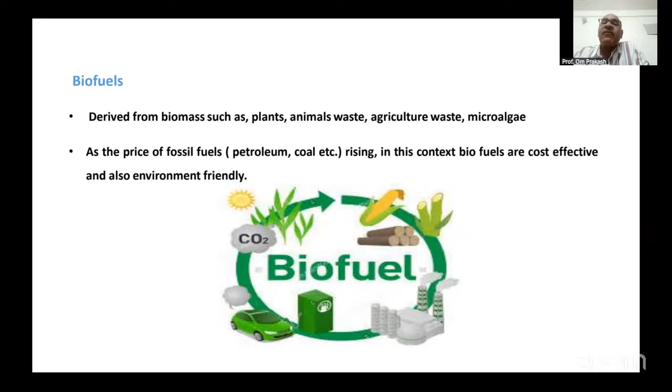Now, my topic is ethanol. Ethanol is a clear and colorless liquid produced from sugars such as sugar cane, sugar beet, and starch. Ethanol blending with fuel also improves the performance of the internal combustion engine. As for how ethanol is produced, there is first generation, second generation, and third generation. Nowadays we are moving toward second and third generation.

In first generation you will see sugar cane, sugar beet, starch, wheat, potato, barley, corn, etc. being used, and from there ethanol is produced. In second generation we normally see wheat straw, lignocellulosic material, rice husk, wood grass, and forestry waste; whatever waste there is, that is used. In third generation, you will find microalgae and seaweeds being used for the production of ethanol.

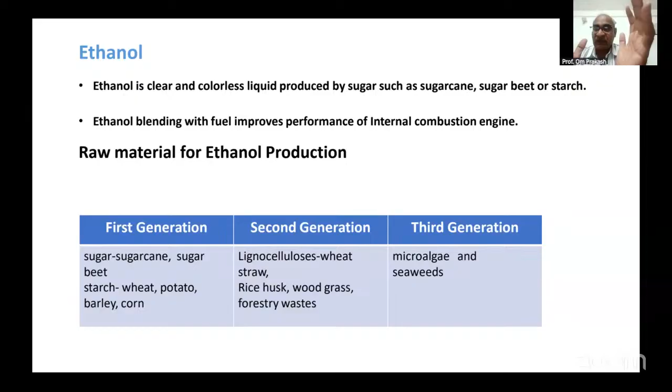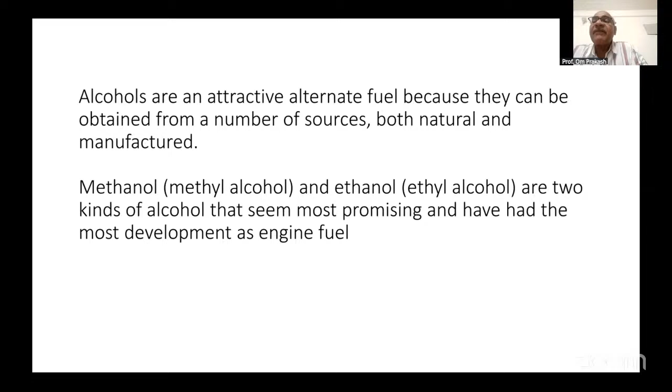So these are the sources by which we can produce ethanol. Next, what is ethanol? Ethanol basically is alcohol. Alcohols are an attractive alternative fuel, because they can be obtained from a number of sources, both natural and manufactured. Methanol and ethanol are the two kinds of alcohol that seem most promising and have had the most development as engine fuels.

Now you see the advantages. Whatever research we have done, or our ancestors had done, we have to see what the advantages are and why we would go for mass production or increase its use. First, it can be obtained from a number of sources, both natural and manufactured.

Second, it has a high octane number. That is the anti-knock index, and it is over 100, which means a very good fuel. A high octane number results in high flame speed, so the combustion time is reduced. Next, engines using high octane fuel can run more efficiently by using a higher compression ratio.

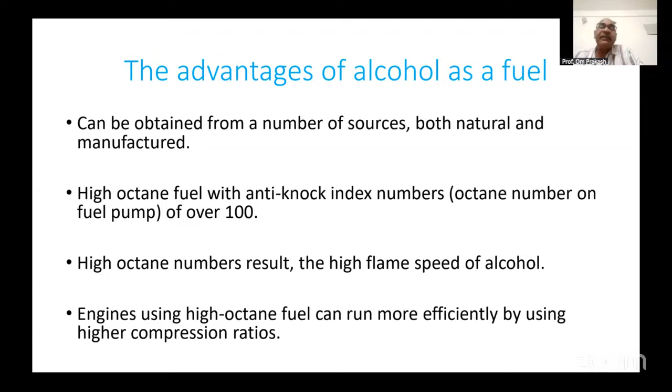As we all know, as the compression ratio increases, we get more work done. That's why increasing the octane and the compression ratio gives another advantage on the combustion side, which we get if we use a high octane number fuel.

Next, it generally has less overall emission, according to the research done. Compared with gasoline, when it is burned it gives far more moles of exhaust, which gives higher pressure and more power in the expansion stroke, because the compression ratio is higher. With a higher compression ratio, the expansion stroke will be higher and you will get more power.

It has high evaporative cooling. When the fuel comes inside the engine and evaporation takes place, the heat is taken from the air itself. The air and fuel mix and go inside the combustion chamber, and during evaporation a lot of heat is taken from the air, so the temperature is reduced.

When the temperature is reduced, the density will be higher, and because of that there will be more volumetric efficiency. So the high evaporative cooling results in a cooler intake process, which raises the volumetric efficiency of the engine and reduces the required work input for the compression stroke.

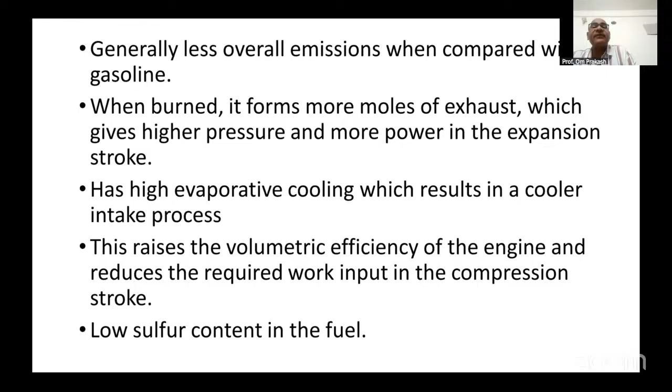Another thing you are finding here is the low sulfur content in this fuel. So these are the advantages you are seeing. And then, after seeing these advantages, we look at where the world is moving.

If you look at worldwide fuel ethanol production in 2021, the United States itself is producing ethanol; the figure is in millions of gallons. So you will see here around 15,000 million gallons, whereas Brazil has 7,500.

And if you see India, as we already discussed in the first discussion, a lot of solar energy is there in our country, and as a result a lot of vegetation is also there. But India is producing around 820 million gallons of ethanol, though presently we have approximately doubled that now in 2025. That's why we are using E20 at present.

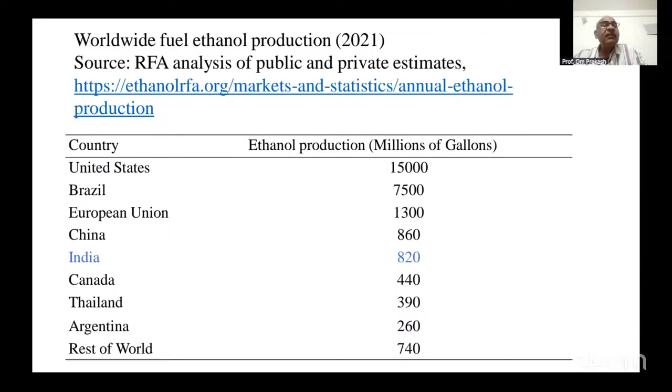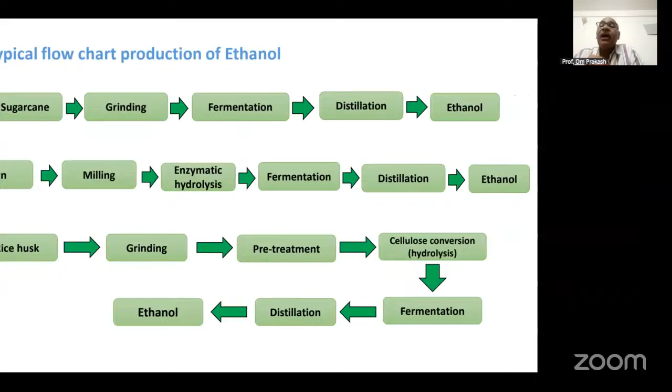Next, for the third generation, rice husk waste can be ground, and after grinding we add one more process, which is pre-treatment. After pre-treatment, we again break it into smaller ones through cellulose conversion, that is hydrolysis. After hydrolysis, we go for fermentation, then distillation, and then we produce the ethanol.

So now you are seeing the physical pre-treatment. After physical pre-treatment, you can see chemical pre-treatment taking place. Then we add the enzymes. Enzymatic hydrolysis is done, and then fermentation takes place, and you can see from the slide how fermentation is taking place. And then you see the distillation process for purification.

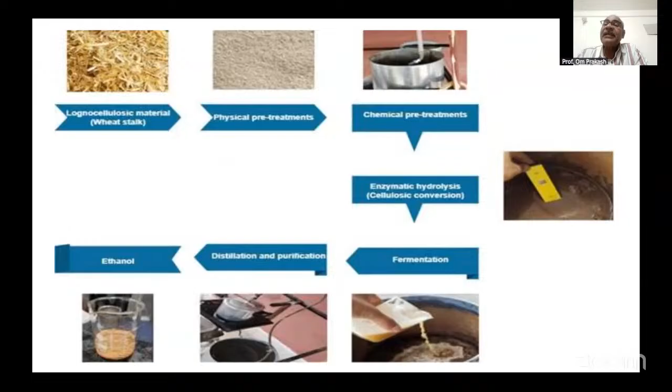Now in the next slide you can see ethanol production by rice husk. The main thing is the resource available. Rice husk is an agricultural waste which is available in abundance at low cost. Next, the beauty of this resource is that rice husk contains cellulose and hemicellulose. Around 670 to 750 million tons of rice husk is produced worldwide every year, and India is the second largest paddy producing country in the world.

You can think of what our basic resources are and where we are lying. So India, you can see, is the second largest producing country here. And in the figure, millions of tons versus the continents, that is one more thing we have shown.

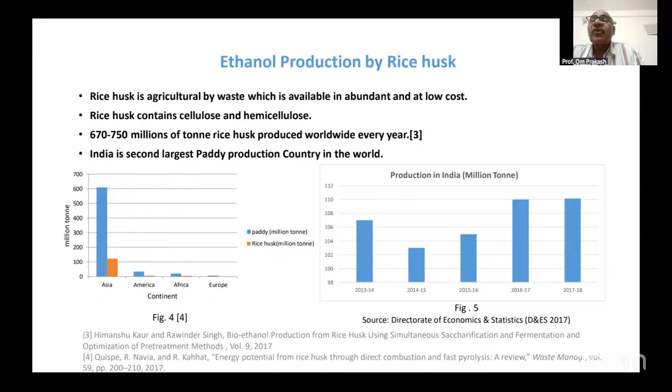And from the Directorate of Economics and Statistics, if you are seeing the production of India in million tons, what the rice is, then you can see here we are still growing very fast.

Now, next thing, the comparison of properties of different fuels. Because I have told you about ethanol, then we have to see how we are comparing this ethanol to the other fuels we are using, like gasoline, diesel, and others. Basically, these are the fuels which are being used.

If you are seeing the octane number, gasoline approximately has 90 to 100, octane number 98, 97 like this. But if you are seeing ethanol, it has 108 octane number. And I know most of you know what the octane number is. And I have discussed the higher octane number gives a very good higher compression ratio. We can go for that, and we can produce high expansion.

Then if you are seeing the cetane number, for gasoline we are not seeing that in the cetane number. It is just the reverse of that. So diesel has around 40 to 55 cetane number, and for methanol and ethanol it's not bothersome.

The calorific value, a second very important thing, which is given here in megajoule per kg. If you are seeing gasoline, it is around 43 megajoule per kg. If you are going into kilojoule per kg, then it will be 43,000 kilojoule per kg. Whereas diesel is approximately in the same range, around 44.65 megajoule per kg.

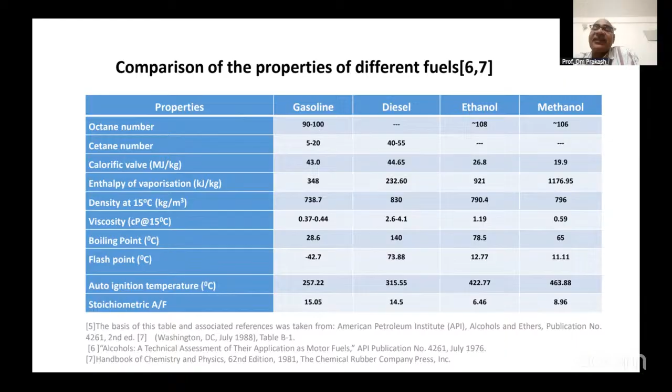So why this property is required: so that we can see what the compatibility of that fuel is, which we are discussing. So that's why you will see the compatibility of this ethanol.

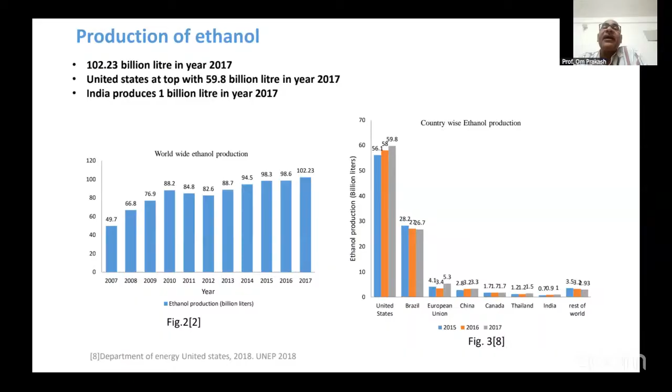Now next thing, if you are seeing the production of ethanol, here you see around 102 billion liters per year. Then the United States, how much it is, and how much India is producing. So from this figure, one can see ethanol production in billion liters, year-wise. The data available here is up to around 2017, and this shows the increasing trend in the production of ethanol.

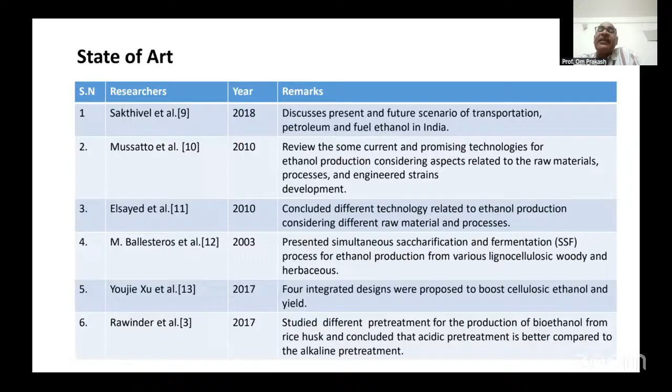Now, whatever the state of the art is, we see how it is going for the production. Through that we came to know what opportunity there is and what other researchers have done. On that basis we have formulated it. Then the experimental setup, because this is very important: we have seen that it is compatible, and we have seen that whatever property is required, that property is being met.

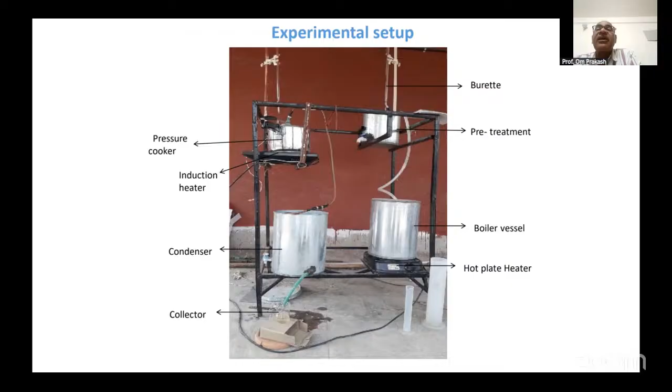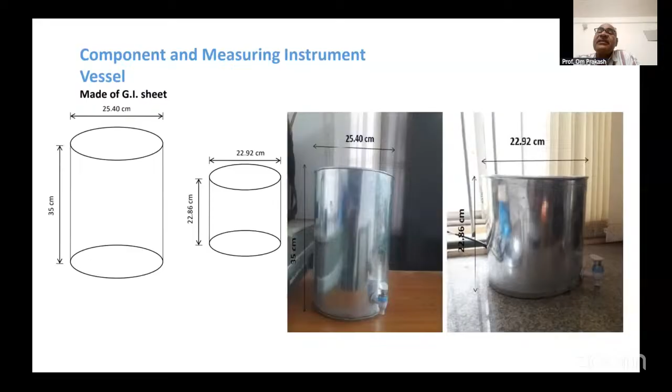Now next thing, what are the components, because the important thing is how much we are going for, what measuring instruments we are using, and how the components are produced. So now you can see it is made of GI sheet here. All the dimensions are given here, and with those dimensions the experiment takes place. Now you can see how we produce the condenser. Everything I am showing here is being done at the college level itself by the students.

So now you can see how they have produced the condenser: we have taken a copper tube around 3 meters in length so that we can have the coiling, and a vessel around 35 centimeters with a diameter of around 25.4 centimeters. The coiling is done, and that coil is put in the pot, which is around 35 centimeters with a diameter of around 25.4 centimeters.

And then you can see here the pH measurement, because pH is very important for the pre-treatment and is required for the fermentation; unless that pH is maintained, the fermentation will not take place, or if fermentation takes place, it will be in a smaller quantity. So you will see the range here of the measuring instruments we have taken, their dimensions and weight, because the measuring instrument is one of the very important things for measuring the quantity produced.

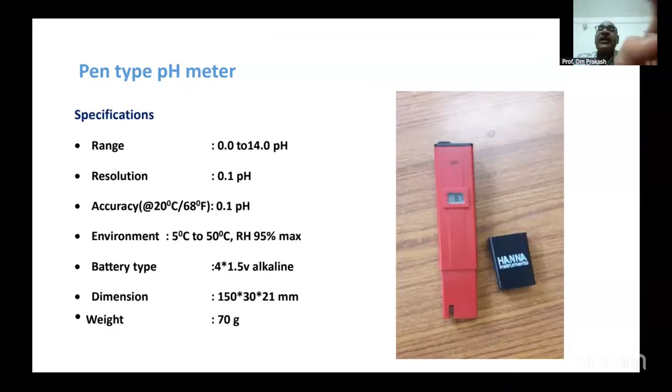So that's why it is an important thing, and we have to specify that. Now next, the calibration of the pH meter is also being done, because we have to check what instrument we are using and whether it is giving the correct reading or not. So for checking the correctness, calibration of the instrument is very important.

For the calibration purpose, you can see here the calibration with the buffer solution of pH 7, which we have taken because it is already fixed, and through that we have checked and found it correct. If any mistake or deviation is there, then the deviation we can write down.

Then another checking we have done is the calibration by buffer solution of pH 4.1 for the acidic region, and that also we have noted down. Then again checking with calibration for the buffer solution with pH 9.2 for the alkaline region. This range itself shows that if we are checking with different ranges, we will find if any deviation is there, and that deviation can be added to whatever exact reading we are getting during our measurement.

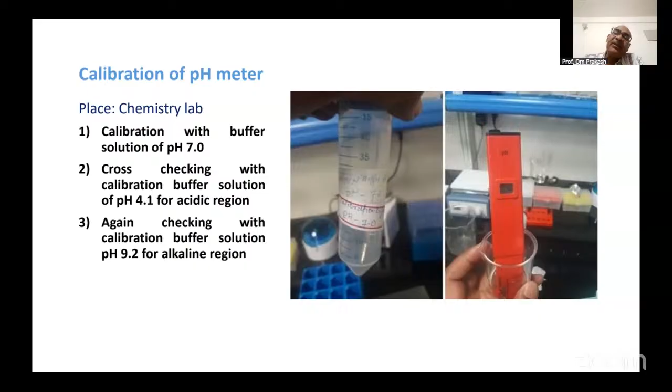So it is a very important point for the calibration, for any things we are taking for the purpose of measurement. Now next, the hot plate is there, and its specification you can see here very easily. This is around 1250 watt we have taken, and the voltage accordingly, and here the burette we have taken, that also 50 ml.

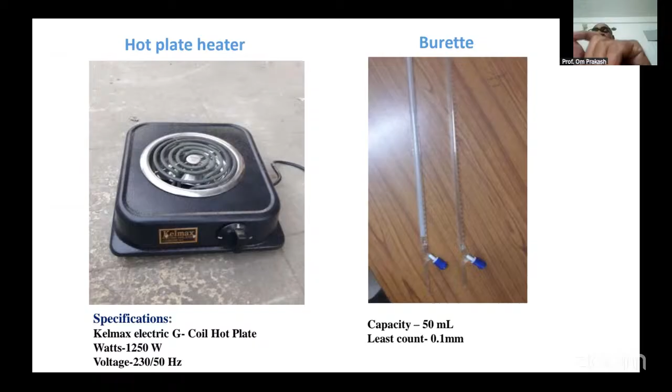And why the burette is there, so that whatever quantity of this pre-treatment enzyme we can put it in this, and that will give exact measurement.

Now if you see the induction here, we have specified all the inductions, in which the weighing machine also—that weighing machine has approximately 0.001 gram accuracy.

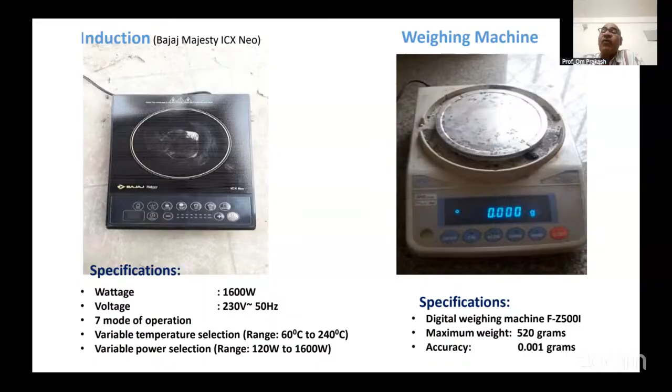And you can see the variation of temperature if you are selecting the heating instrument, that is approximately 60 degree to 240 degree. And variable power selection we can do from 120 watt to 1600 watt. These are very important parameters when you are going for the experimental work, so that we know how much variation we can take.

If you see here the high temperature thermometer, what is approximately the temperature and accuracy, how much it is there. Approximately, if you are measuring minus 20 to minus 50 degree centigrade, in that case plus minus 2 degree variation is there.

And around minus 20 to 200 degree centigrade, around 1 degree variation. And again for the higher range, around 200 degree to 300 degree centigrade, you can see plus minus 2 degree variation. From this you can see the importance of calibration.

Then another LCD digital thermometer we have used, and that also has a temperature range of minus 50 to 110 degree centigrade, with accuracy around plus 2.5 degree centigrade to 1 degree centigrade.

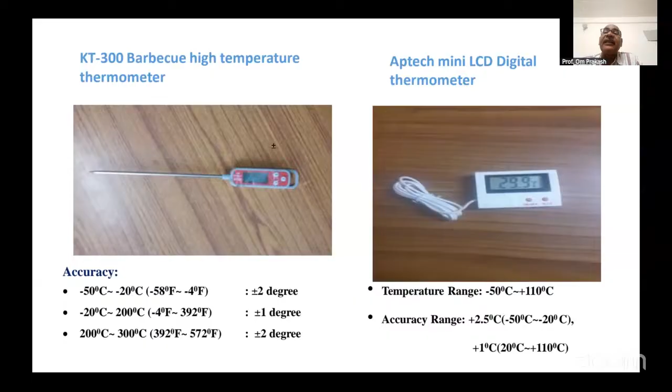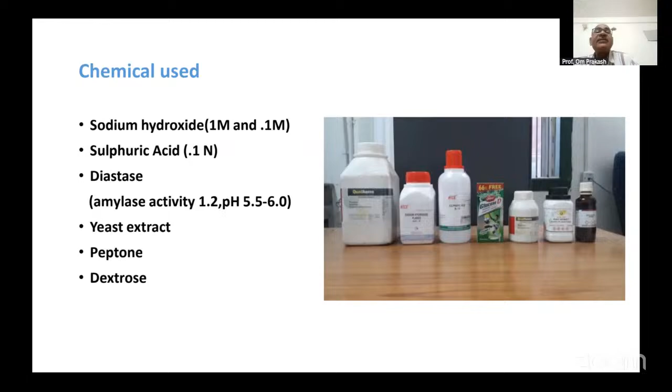Now next, the chemicals used for the pre-treatment and enzymatic treatment: sodium hydroxide we have used, sulfuric acid, yeast extract we have used, and peptone and dextrose, which is being used for this treatment process.

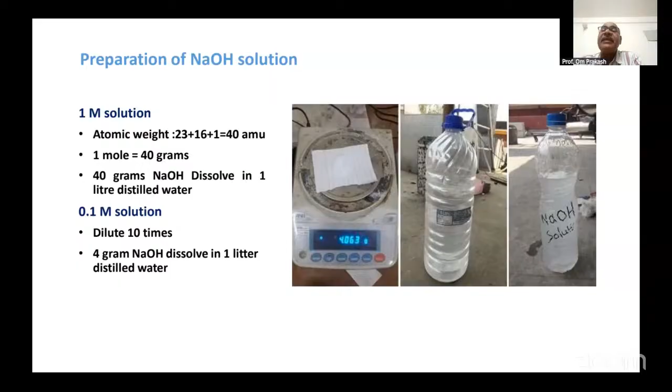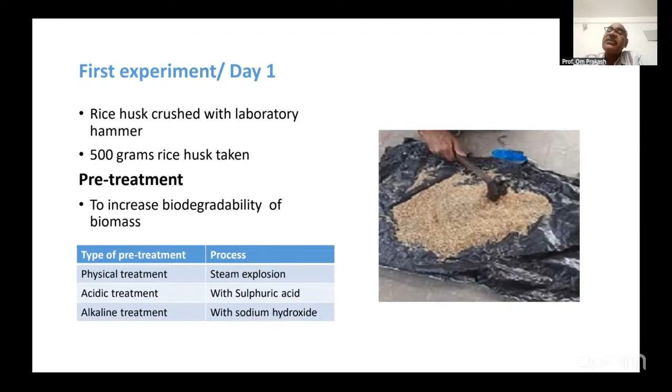We have done acidic treatment using sulfuric acid, and alkaline treatment using sodium hydroxide. After all this treatment, we have measured the physical treatment, steam explosion, for which we have taken a boiler. From the boiler the steam is produced, and that steam is given for treatment.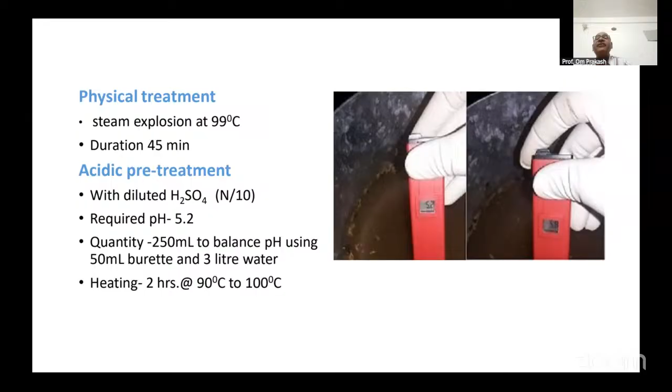The duration, how much time did we go for that? Around 45 minutes we have gone for that. Then for acidic pre-treatment, H2SO4 we have used, and the required pH is 5.2, quantity around 250 ml, and we balanced that. Heating around 90 to 100 degrees for 2 hours we have done. Then you can see, by balancing the table here, the quantity of sulfuric acid and equivalent pH is given in the table.

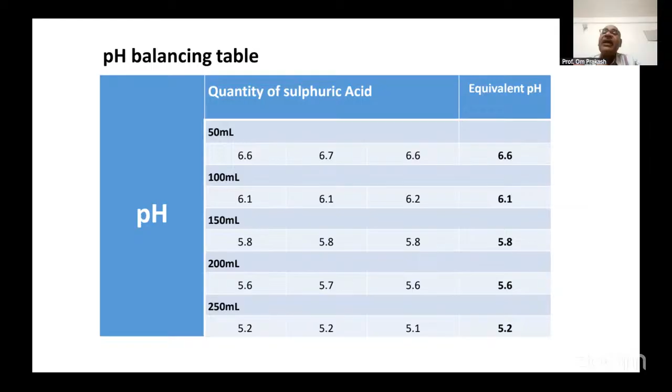From that table, one can visually see 50 ml, 100 ml, 150 ml - different quantities of 50 ml each time. When we did this, we got the equivalent pH.

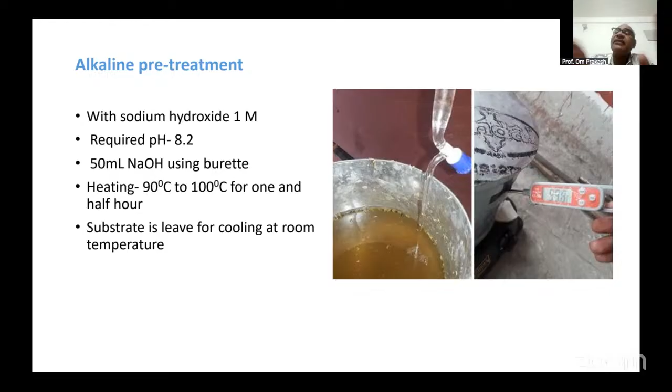Then the alkaline treatment: sodium hydroxide solution, you can see from the burette how it is being mixed, so that we can increase the pH to 8.2. 50 ml NaOH is used from the burette, and then it is treated at 90 to 100 degrees for 1.5 hours, and the substrate is left for cooling at room temperature slowly. This cooling is done so that we can stop the treatment. After treatment it reaches normal temperature, and then finally we go for enzymatic hydrolysis.

Enzymatic hydrolysis is for breaking cellulose and hemicellulose into simple sugar. That's why enzymatic hydrolysis is done. Amylase with fungal diastase is used here. The quantity approximately used for 5 kg is 0.6 gram per liter - around 1.8 gram dissolved in 250 ml conical flask, mixed with the previous substrate.

Then we got the pH around 4.2 by adding some more H2SO4, approximately 50 ml we have added. Through heating at 80 to 90 degrees for 45 minutes, the solution is then incubated for around 24 hours. Why 24 hours incubation? So that the enzymatic treatment can be completed - otherwise it takes more time, and that time is what we have given here.

During my experiment, at this stage it is around 24 hours. So further, for the next treatment, whatever quantities or pH or other things we vary, in that case how we can reduce the enzymatic treatment time - that incubation time - from 24 hours to a smaller one. By trying different temperatures and different treatment methods, we can find the optimal quantity, and that's why this experiment has been done to find that out.

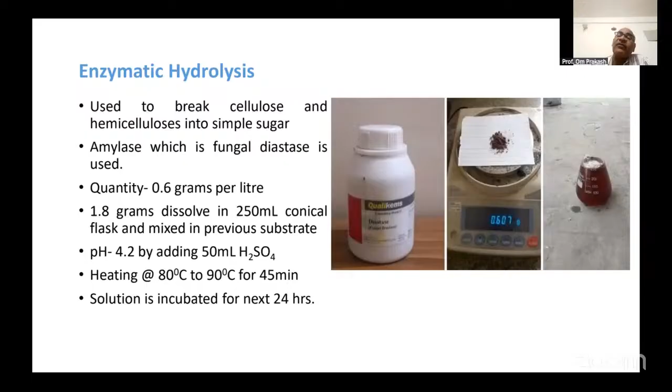The pH adjusted here is approximately 5.8 by adding 100 ml more H2SO4. It takes around 3 days to complete the fermentation. Again, as a researcher, we see the fermentation takes 3 days, whereas the enzymatic treatment takes 24 hours. So both processes require a lot of change - we have to see how we can reduce the fermentation time, along with reducing the enzymatic time.

This is again by varying the different quantity we have taken, and by varying that quantity, that will produce lesser time, making the production process more simple, and that can be increased. That's why this variation is required.

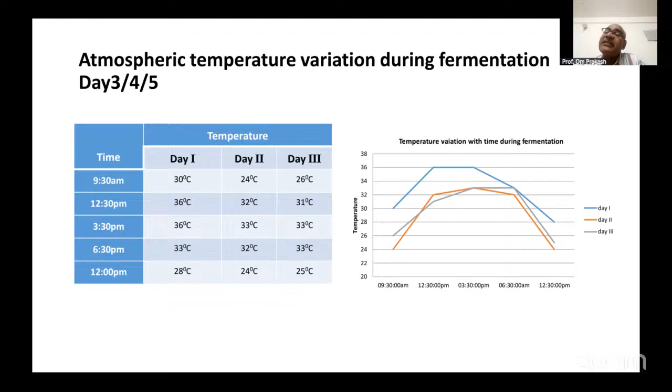Now if you see the atmospheric temperature variation during the fermentation time for the third, fourth, and fifth day, you can see every time the temperature is measured, and the diagram shows it during the fermentation, because fermentation depends upon the temperature. Now if you see the result of the first experiment, we did not get a satisfactory result after fermentation, and the major reason we found is we did not use proper fermentation media.

Next, the fermentation does not occur properly because the vessel is opened early. That means if the vessel is opened early, we are not able to take out that material. Also, distillation is accomplished using simple insulated vessels, therefore leakage of vapor happens, and that should not happen — it should be covered very easily.

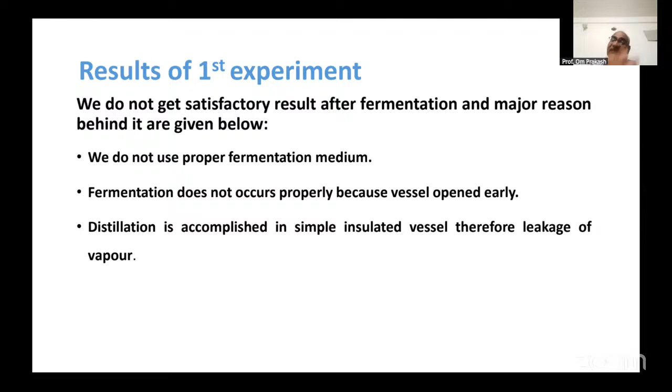So from that first experiment, these are the results we got, and we implemented these results into the second experiment.

In this second experiment, the preparation of biomass involves rice husk cleaning and drying in sunlight, then the rice husk is milled to flour. Earlier we had just done hammering, but in this second experiment we did crushing and milling so it becomes smaller particles. So 1 kg of rice husk powder was taken for the experimental purpose.

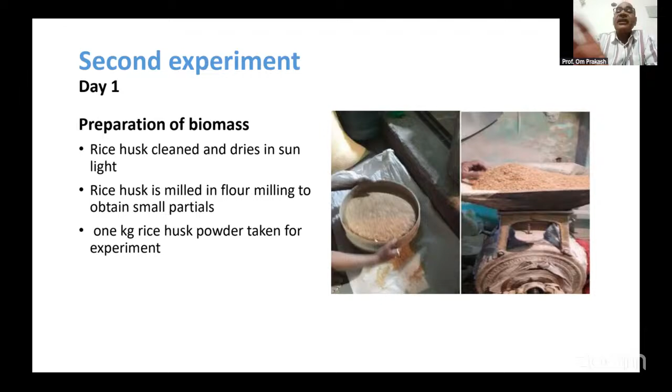Now you can see the milling machine here. We put the rice husk into this machine and milled it so that it becomes smaller parts.

Now on the second day, for the pre-treatment of 1 kg rice husk, we did physical treatment with a 99 degree centigrade steam explosion.

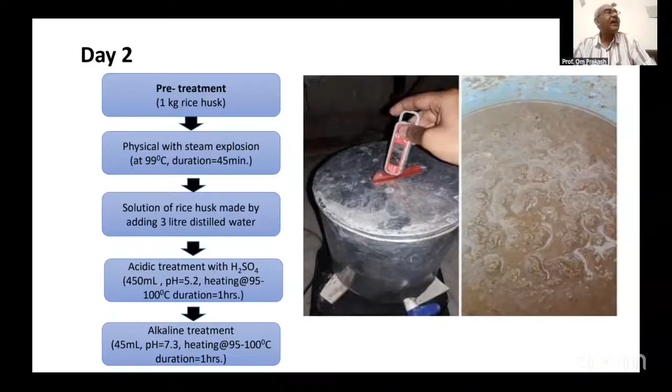Then alkaline treatment is done again — we performed it using around 45 ml, with pH at 7.3. Heating again at 95 to 100 degrees centigrade for 1 hour.

Then on the third day, enzymatic hydrolysis is done. We put 1 gram per liter here, with 4 grams dissolved in a 250 ml conical flask.

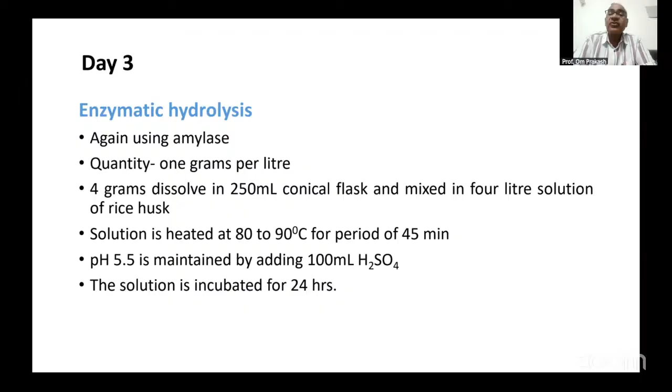That solution is heated at 80 to 90 degrees for a period of around 45 minutes, and then the pH is brought to around 5.5 by adding H2SO4. The solution is incubated for 24 hours, and then fermentation is done for 4 days.

For fermentation we put yeast, peptone, and glucose — these three things are added, and the total solution is prepared to 3 liters, with the fermentation temperature maintained around 37 degrees. The pH is again maintained around 5.6 by adding 100 ml H2SO4.

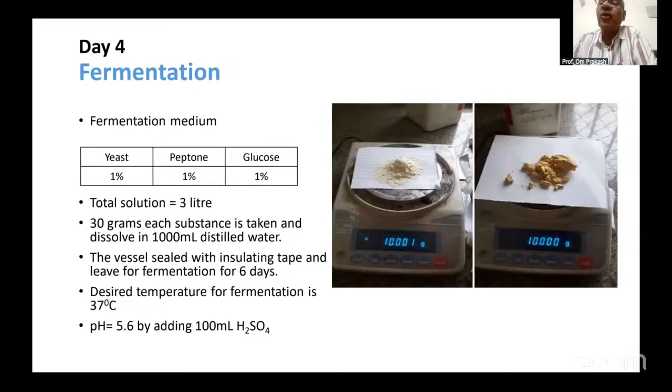Now you can see the things we put in, like yeast, peptone, and glucose — all of this is measured here and then added to the solution.

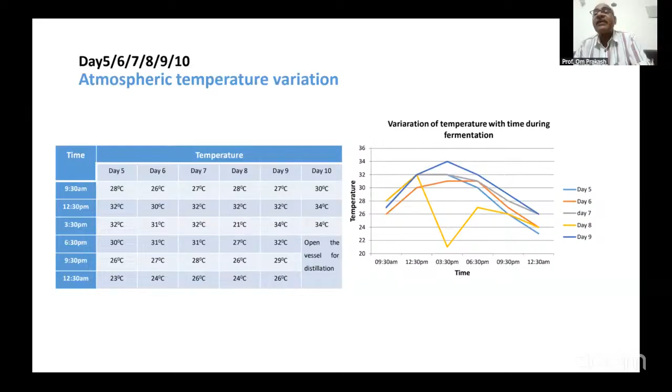Then you can see the atmospheric temperature is maintained, and again the variation of temperature for each day is measured. Here the temperature variation is slightly more, and over days 5, 6, 7, 8, and 9, this is observed, and this observation gives us the results.

Now you can see, on the 11th day after doing this fermentation, distillation is being done, and that distillation is done by using the pressure cooker here. A slurry is obtained; you can see it from the experimental setup here. The slurry obtained after fermentation is filtered using the cloth and sieve, and then approximately 2.5 liters of fermented solution we have got.

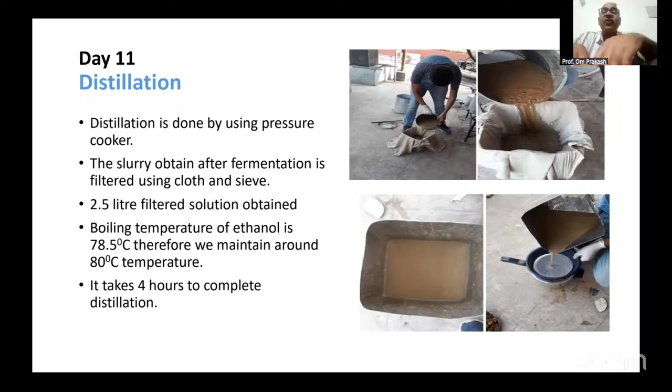Now, from the 2.5 liter fermentation solution: the boiling point of ethanol is around 78.5 degrees centigrade. Therefore, we maintain around 80 degrees centigrade temperature very easily, and it takes around 4 hours to complete the distillation. And after distillation, you can see here the ethanol recovery. That's a very important thing.

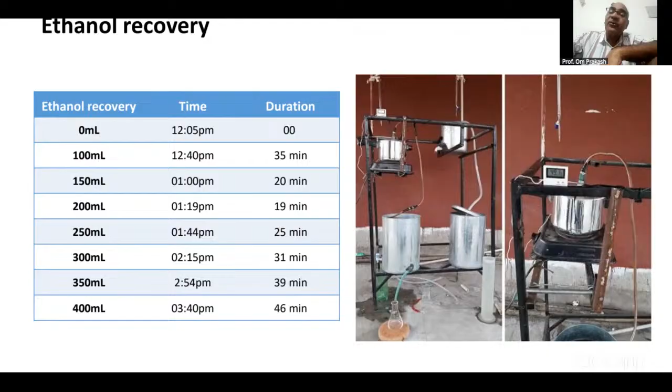So see, ethanol recovery is there. But how much duration is there? How much ethanol have we recovered? So for the time we have taken, around 400 ml of ethanol we have got. And from the experimental setup, you can see how the ethanol is being produced. In one beaker, you can see here, ethanol is being collected after this distillation.

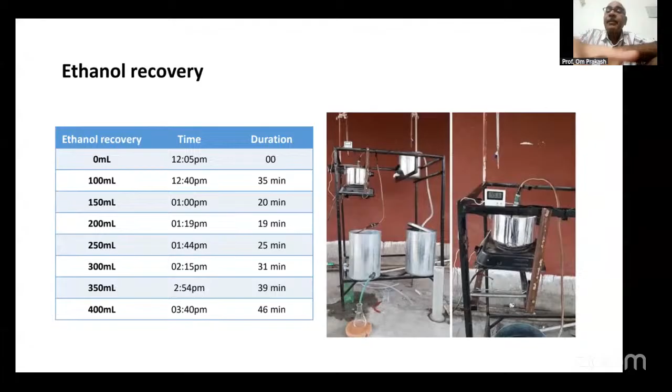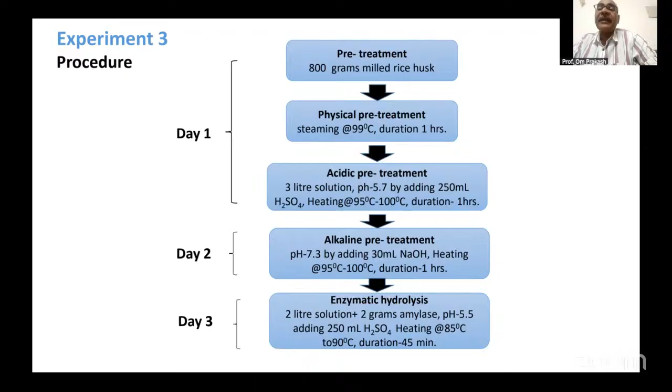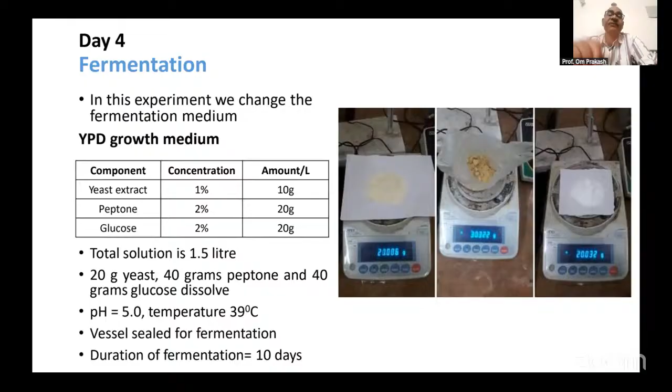And through that, again, the fermentation is done in the similar manner we have already discussed. And then while distilling, you can see the color here, the change we can observe, which you can easily observe from that experiment and the next experiment we have done.

This time we are using induction heating in place of the hot plate, and better temperature control we are able to do with this. pH is maintained around 4.3. The process temperature was around 79 to 82 degrees centigrade, and around 1.7 liters total filtered solution we have taken.

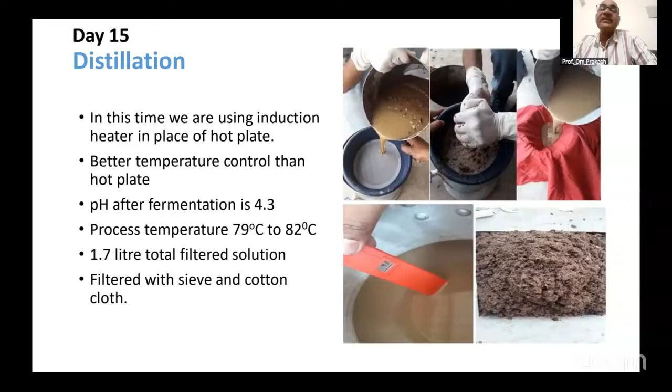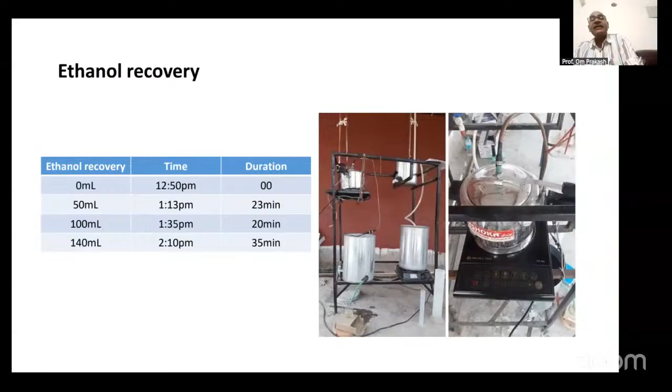And after the separation, if you see the ethanol recovery, we have slightly increased it to around 140 ml, and it has taken a smaller time. So now we have seen the processes by which we produce ethanol. Preparation and production of ethanol we have done, and 2 or 3 experiments; some more experiments we have to do, to see how much recovery we are able to get through this experimental work.

And that's why I am showing you all how we have to perform these experiments, so that you can see, by varying what things, what result is coming. Because unless it is done in the laboratory, you cannot go for the production process. So we have to see how to increase the production, and what effects are there; that effect we have to observe. That is the important thing.

Another thing is, after doing these things, we have to go for engine testing. So whatever ethanol we have produced, the same ethanol we have used here, to see how the performance of our engine is.

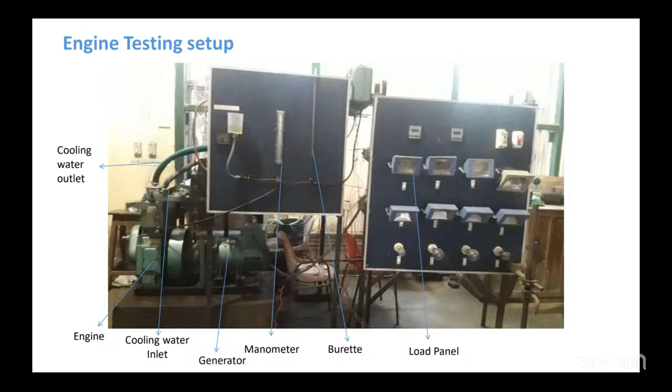Hello, are you able to listen? Hello, hello. Yes, please. Ah, Rahul. Hello. How much time is left? Yes, sir. 15 minutes left, sir. Okay. So that's why I am going for the next one. Okay, sir.

So now you can see here the engine testing setup. This is again in the laboratory. You can see how all this experiment is set up at the laboratory by the students themselves. Don't think that these instruments were purchased from a vendor and put in. All this is prepared here itself, and the students have fitted all these things.

So you can see very easily in the testing setup, this engine is a Kirloskar engine, and there you can see the burette and other things, whatever pipelines are there. All of this has been put on the board by the students.

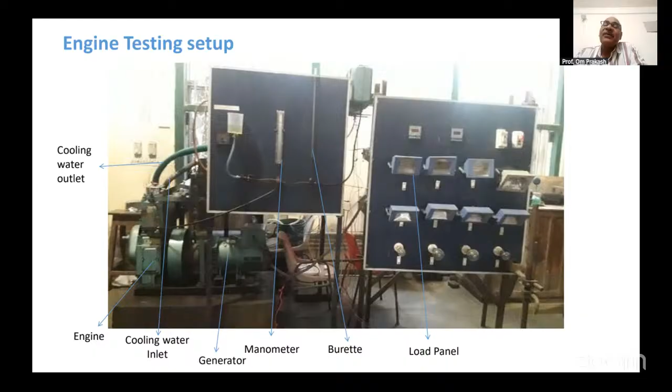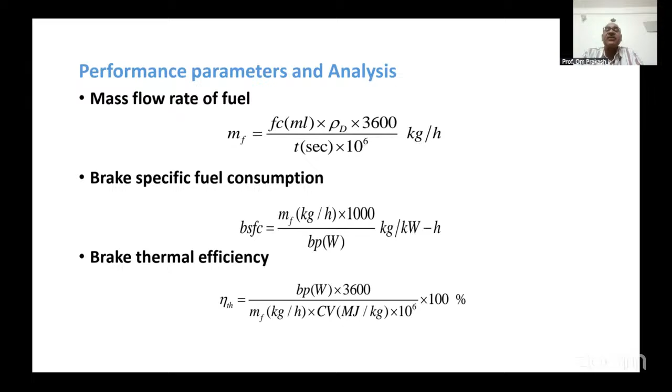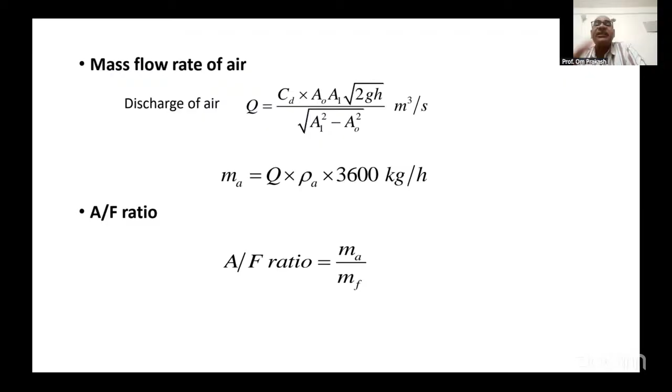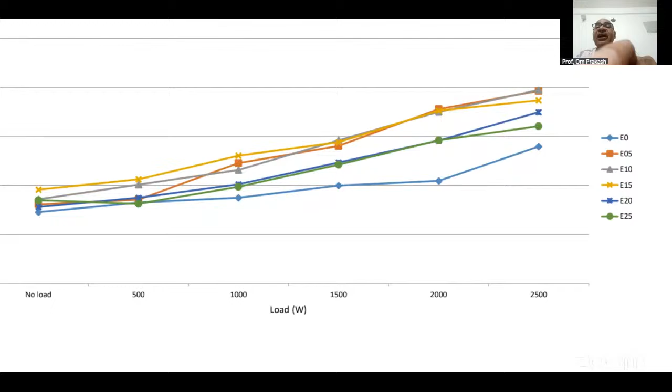And one of you can ask why you are going for the 25%. So now you can see, from the 25%, if you are going for a mixture with ethanol, you can see the curve here. That curve itself is showing the mass flow rate is reduced when you are going for the higher load.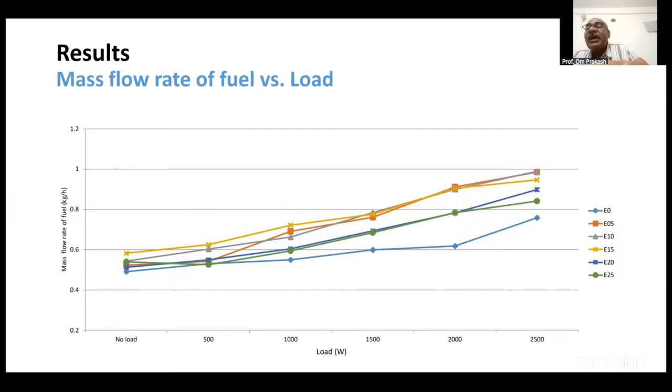And then you can see here again the mass flow rate of the fuel versus load. You can see here which way the load is increasing. If your load is increasing, the mass flow rate of the fuel is also increasing. And what is the pattern there, and that's why we have gone for the E25 here. If you are going for E5, E10, and then E15, you are having the increase. But when we are going for the E25, you have seen it is decreased.

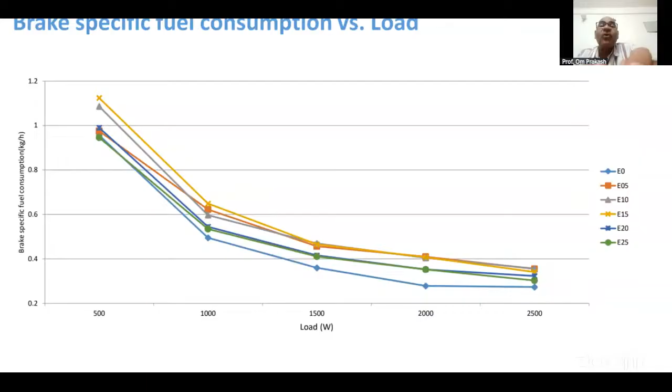So again, the brake specific fuel consumption, that is a very important parameter for measuring the specific fuel. That means the fuel per unit of power generation, how much fuel is required. So if you are seeing the load variation here, if you are increasing the load, you can see the brake specific fuel consumption is decreased. And the important thing is, for E15 you are seeing the specific fuel consumption is higher. And when you are increasing the load, that variation will be on the lower side. Here you can say the brake specific fuel consumption, when you have the lower load, will be higher. It is a well known fact for every engine.

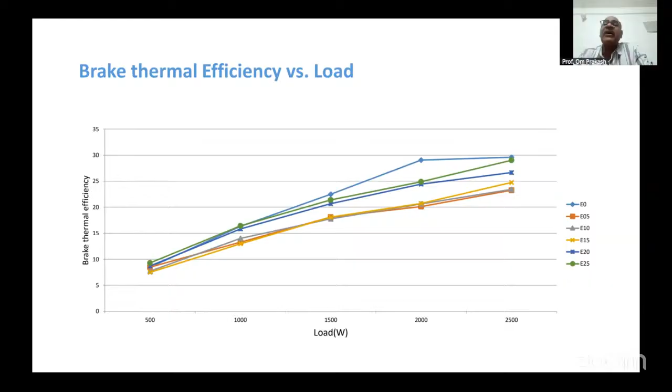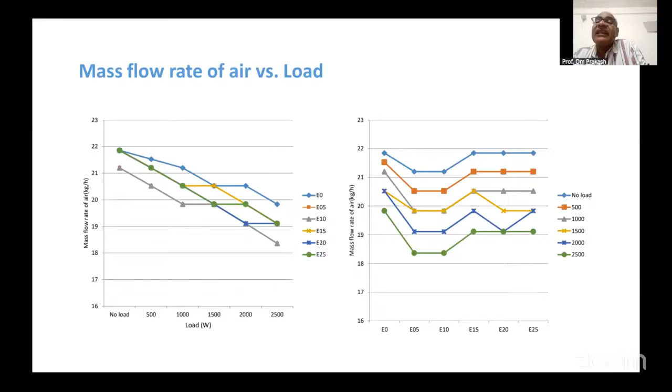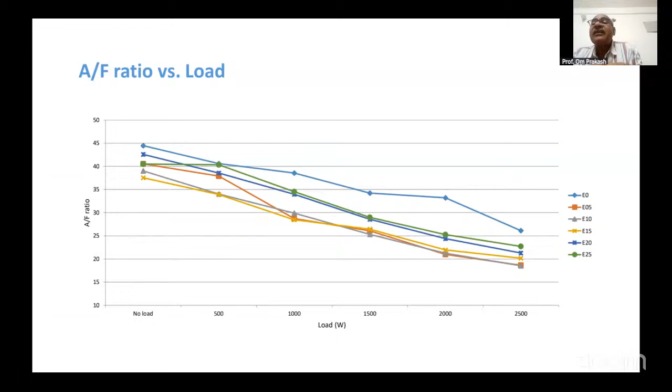And the trend of the mass flow rate of the air in kg per hour, if you are seeing, again that measurement has been taken and that can be seen in the graph itself. Now the air fuel ratio, you can see here, the air fuel ratio is lower than the E0.

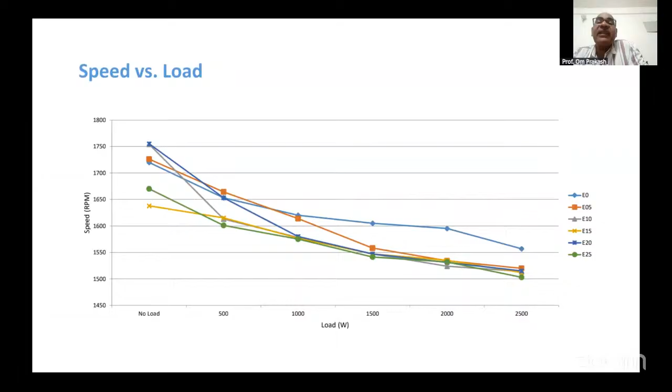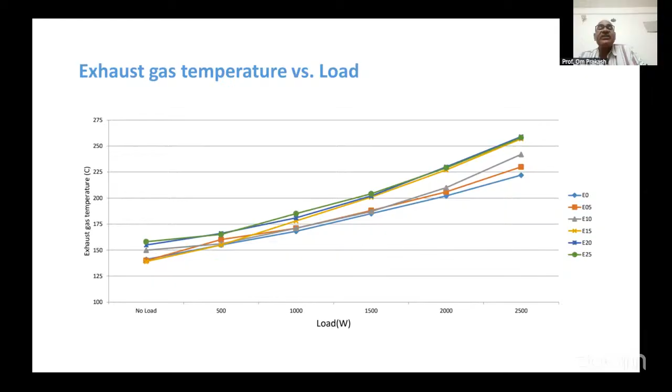And you see, E25 is having the exhaust gas temperature on the higher side, whereas you are seeing the E0 having the lower, and this higher exhaust gas temperature shows that some more utilization can be done.

If you see the conclusion here from the present work, ethanol is renewable and sustainable, and that can be used as a source of energy, an alternative fuel to fossil fuel, and cheap as compared to the crude oil. The mass flow rate of the fuel increases as the load increases, and the maximum you can go for is 2500 watt. And it can be seen that as the blending percentage increases, the mass flow rate of the fuel is increasing due to the lower calorific value of ethanol fuel.

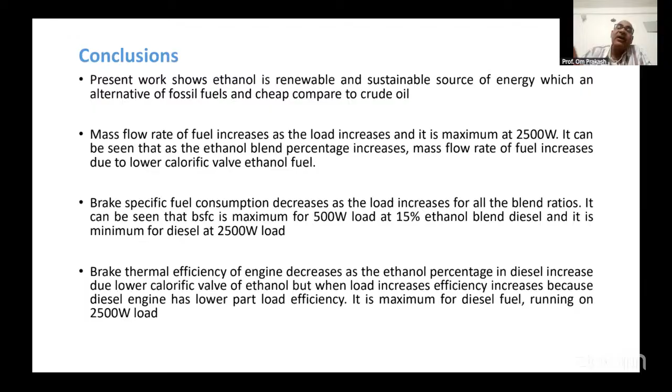The brake specific fuel consumption, you are seeing around 15% ethanol blend diesel, it is having the maximum. The brake thermal efficiency of the engine decreases as the ethanol percentage increases, lower than that of pure diesel fuel running with the 2500 watt load. That means with the load also the variation is there.

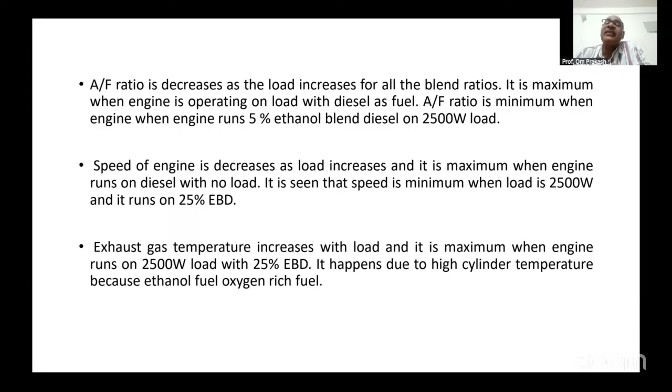Air fuel ratio, if you are seeing from this experiment and the presentation, that is also very good. And exhaust gas is having slightly higher temperature because oxygen is already there, and the flame speed, because octane number is very high, in that case the flame speed is higher, and that's why it will be able to burn.

So we have seen the advantage, but some disadvantages also have to be looked into. What are the disadvantages of the alcohol fuel? That is the low energy content, that we have already discussed. And alcohol contains oxygen, so it requires less air for stoichiometric combustion. The engine we are testing is used for diesel, but it requires a special design when we are going for higher alcohol content, that ethanol. In that case, we have to do some modification of the engine, and that's why it is required here.

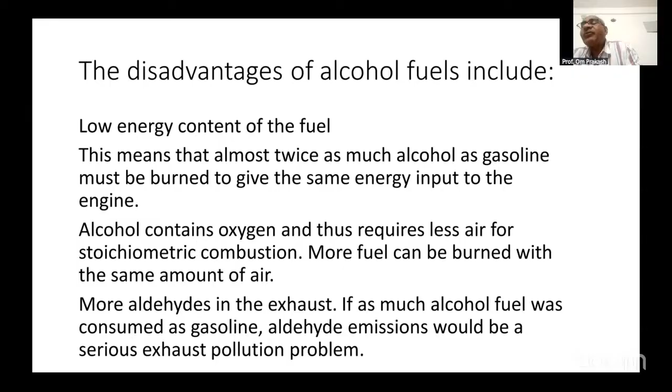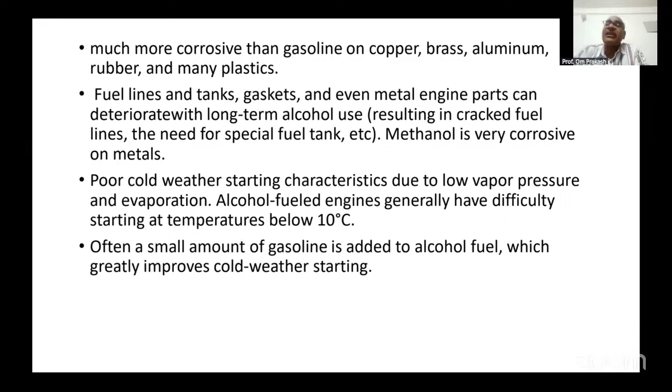Next, you can see the aldehyde formation is also there. It is also more corrosive than gasoline, like for copper, brass, aluminum, etc., so in that also you will be having that disadvantage. The poor cold weather starting characteristic is there, so that also we have to look into. Often a small amount of gasoline is added to alcohol fuel, which greatly improves the cold weather starting.

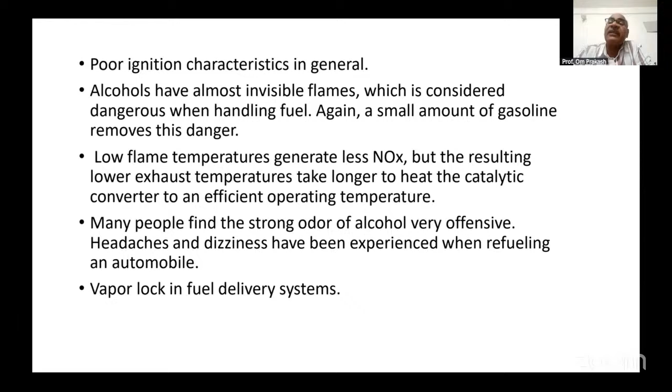And with this, this very important thing is there. Now the question from your side, those who are listening, may be coming: why we are going for ethanol. So first thing, it is an available resource, it is with you. So if you are going for batch production, like nowadays we are seeing in every house we are having solar panels, and with that solar panel we are able to cater some energy, and with that we can do these things.

Similarly, in small villages there is a lot of biomass. With that biomass we are having a lot of waste, and that waste can be utilized here for production of ethanol, produced on site, and easily you can produce it and use it for day-to-day activities like the pumping set, tractor, and other things.

Now, I think we have.

Hello. Yes, sir. So I think a great opportunity is there for countries like India, where we are importing a lot of fuel from other countries, whereas we have a lot of resources. If there is any question on this, then we can discuss.